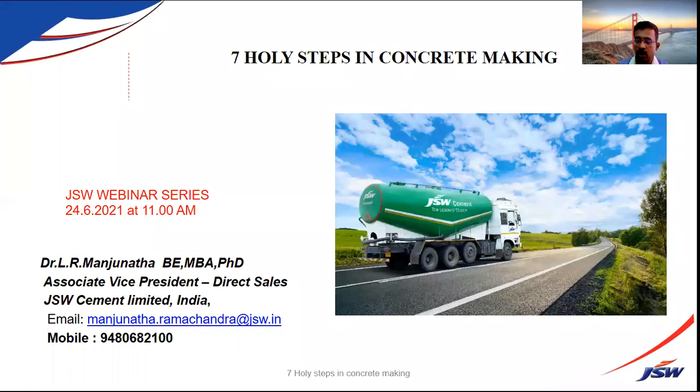You may get the best materials in concrete making, but still you may not be able to get the best quality in concrete after it is laid if you are not taking proper care. My colleague Manoj has already shared about the company vision, so I'm not going to talk about that. I'll go straight to the presentation.

These are the various products JSW is making. We have JSW PSC, which is the most eco-friendly cement. Then we have JSW Comcem, a blend of slag and fly ash - one of the best cements available in the country now. JSW Concreel HD is the cement which builds monumental structures, especially for underground structures. It's very good - a slag cement which gives very high compressive strength, just like OPC cement.

Then JSW GGBS is one cement - a product which goes with ready-mix concrete. Across India, we are selling close to about 3 to 3.5 million tons, and this product is gaining global acceptance because of its benefits. Many countries across the globe are manufacturing concrete using JSW GGBS. We are trying to export also.

Then slag - JSW screen slag is one more product. It's an eco-friendly sand, a replacement for river sand. I'm not saying it's a replacement for M sand, but it is much, much superior, and its quality and strength parameters are equivalent to river sand. This product is gaining acceptance in Karnataka, North Karnataka, and likely in South Karnataka also - many queries are coming for this product.

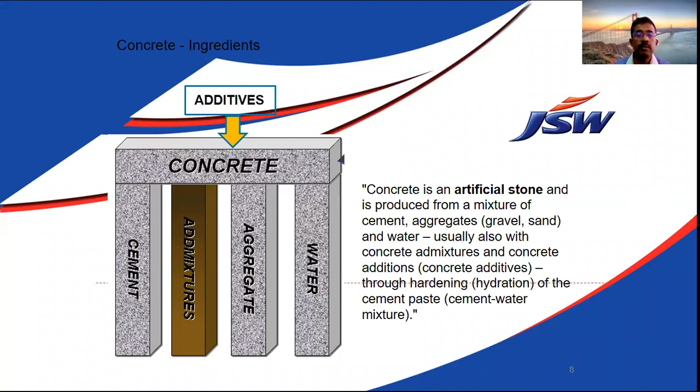Concrete ingredients mainly contain cement, which is the binding material along with water reacts. Then we have aggregates - 12mm, 20mm, 40mm aggregates. Then we have fine sand, which constitutes about 26% of the total concrete mix. Let's say we are designing concrete for 2,400 kg per cubic meter - it varies, but the density of concrete is generally 2,400 kg per meter cube.

When you want to make concrete, there may be M20 grade concrete or M100 grade concrete, so we vary the ingredients - the water cement ratio, admixture dosage, and aggregate percentage based on water absorption. Overall it will become 2,400 kg, plus or minus 10-20 kg only - we cannot add 5,000 kg to make concrete unless it's a heavy concrete, like for nuclear reactors where we use high density concrete. Otherwise, generally we use regular concrete.

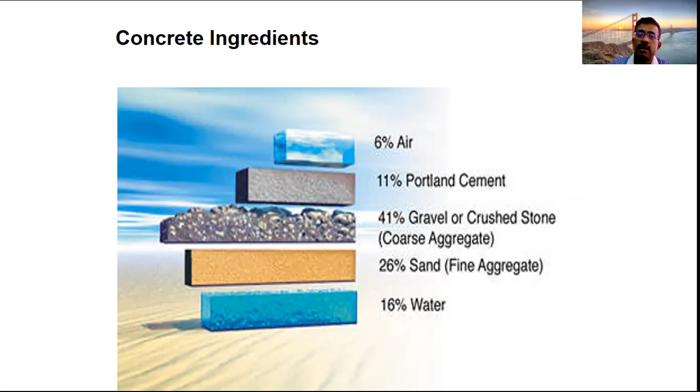So, as I've already told you how concrete is made, finally we end up with a product called ready-mix concrete. From cradle to grave, the concrete journey starts when we use clay, limestone, and iron to make clinker using a kiln in the cement mills. Then we get clinker, add gypsum or mineral admixtures and additions - there are several types of additions happening in the cement mills. For OPC cement, we add 5% performance enhancers.

We may have limestone powder, GGBS, fly ash, as a 5% additive. Then we make cement. So when the cement comes to the RMC plants, we use sand, aggregates, admixtures, and water. So with the various blends of cement, we make concrete, called ready-mix concrete.

Ready-mix concrete has different types. As I already told you, different grades starting from M15 to M100, 150, are used in India. Then we have fiber reinforced concrete, self-compacting concrete, smart dynamic concrete, concrete for mass concreting applications, and there are so many brands available, including color concretes.

So concrete is shaping up based on applications of the concrete, where we are going to use it, what is the durability performance, what is the workability performance of the concrete. Based on that, we are designing the concrete using all these ingredients.

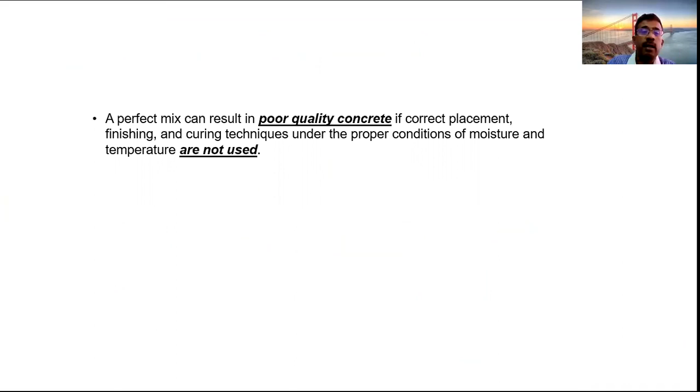Now, a perfect mix of concrete can result in poor quality concrete if the placement is not correct, finishing is not correct, curing techniques are not correct, or proper conditions of moisture and temperature are not used.

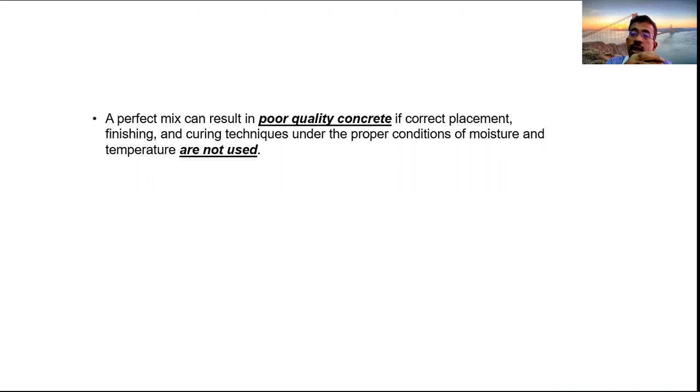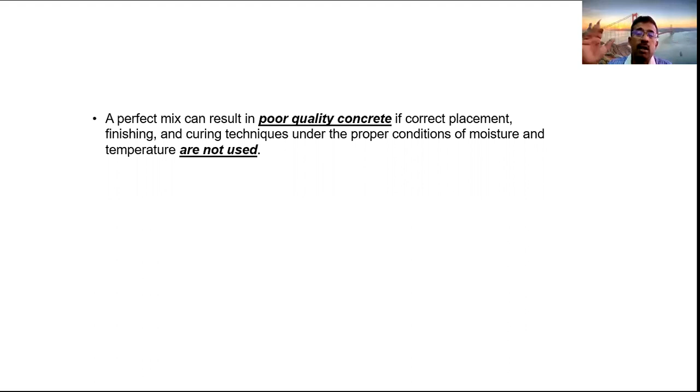If you can design a very good concrete in the laboratory, you can make the concrete at the batching plants. But if you don't place it properly, then we have a problem. That's why I'm talking about only 7 steps in concrete making.

So when specifying concrete, maybe a consultant, maybe a user, he has to look into what kind of concrete I'm ordering. I want to order concrete to the ready-mix plant. I need to understand first what is the concrete requirement for my job. It should not be wastage.

Can I order in intervals? Every 2 hours, one transit mixer should come, or should all the concrete come at one time? So the use of concrete matters — where I'm using it, for the basement retaining wall, roof slab, or column concreting.

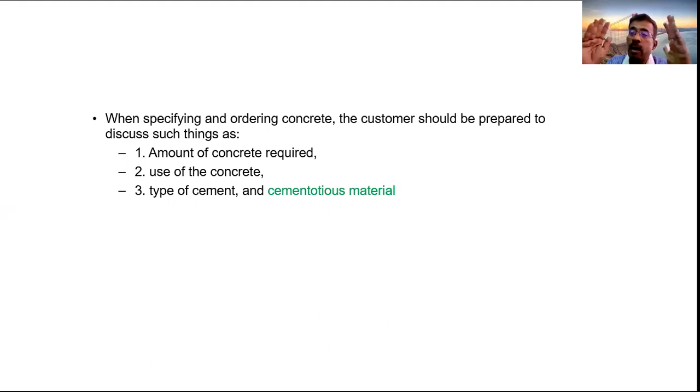Column concreting, let us say I want to use. Generally you can place 10 columns or 15 columns. I cannot order two transit mixers of concrete because the flow of work will be very slow when I'm doing column concreting. So generally people prefer to buy 3 cubic meters from the transit mixers.

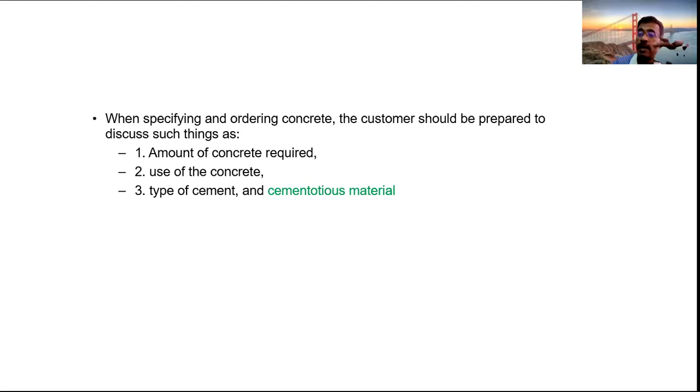Send me 3 cubic meters, let me place the concrete. Then only after placing that concrete, I'll order the next set of concrete, because you have to make a proper scaffolding for putting the column concrete. And what kind of cementitious material are you using?

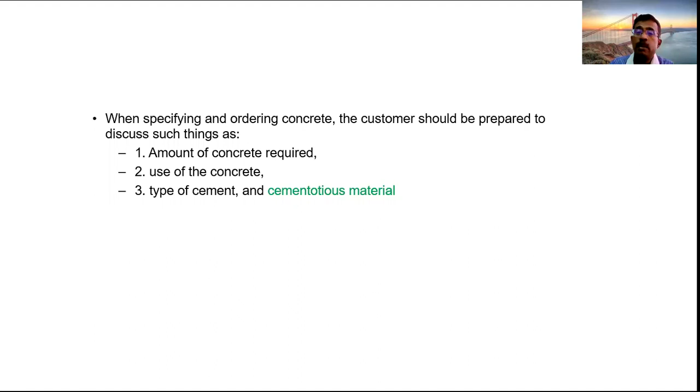I am looking at what is the cement content, what is the minimum cement content I should use, what is the water cement ratio, what is the admixture dosage, what should be the air entrainment, and what is the desired compressive strength?

My 7 days, 14 days, 28 days — I am designing the strength parameters, whether I am using it for precast, and the grade of concrete may be different. It may be M20 grade concrete, but what I am going to use for precast will be different, and what I am using for mass concreting application is different. So based on the requirement of the strength parameters, 7 days strength, 28 days, I am defining the concrete and also the durability parameters.

Then the amount of slump required. So let us say I'm using concrete for a PQC, pavement quality concrete — my slump should be 50 or 60. Then if I'm using concrete for my formwork, I need a free flowing concrete if my congestion is more in the reinforcement, so there are so many restrictions.

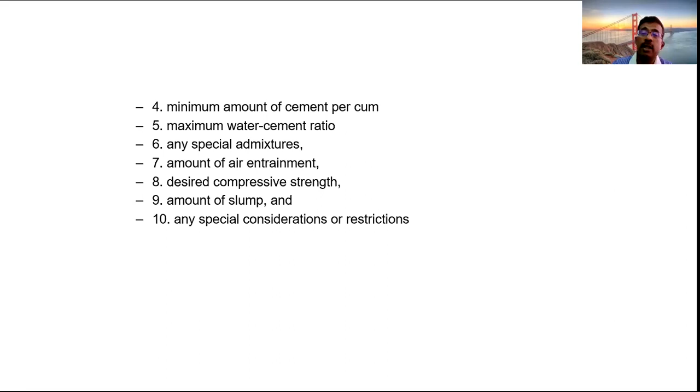So I've told you about the different types of concrete, and why concrete placing is important. So there are only 7 steps in concrete. To start with...

Starting from batching, you select the raw materials. The concrete may be made at an RMC batching plant, or it may be site mix concrete. If the concrete requirement is small, you make site mix concrete. Still, in road work, you make concrete at the site. If you are doing a small culvert work, whether it is ready mix concrete or site mix concrete, you are going.

So batching involves the various ingredients: the aggregates, the cement, the sand, then admixture. So you should properly select all the material, then start batching in a batching plant. Then mixing. The batch goes to the mixer. A half cubic meter batch size is there, a 1 cubic meter batch size is there. So exactly the required ingredients along with the water are taken in one shot and go to the mixing.

So it is machine mixing, a twin shaft mixing, or it could be manual mixing. So there are so many mixing types. Semi-automatic mixers are also available, where you put the ingredients into a small truck-mounted mixer. Then you mix it and supply the concrete.

So let us say I'm to place the concrete. Transportation plays a very important role. I am doing concreting. My RMC plant is 20 kilometers, 30 kilometers away. Sometimes the concrete has been transported up to 50 kilometers. In rural areas they want concrete, they are doing a bigger job. So see, a lead is, let us say, 2 hours. They will transport the concrete maybe 50 kilometers also. So in that case, what should be my mix design?

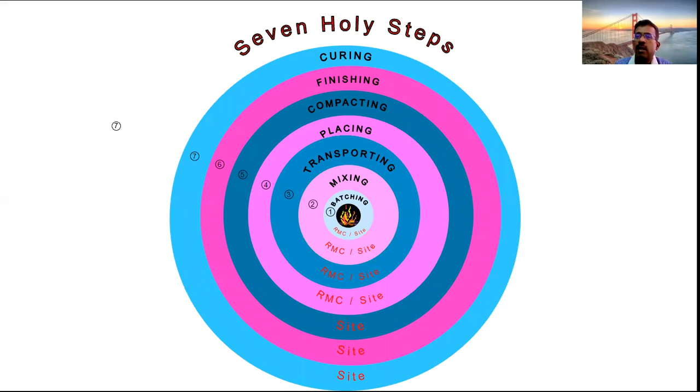Then finishing, how you are finishing the concrete is very important. Finishing the concrete means what kind of finish, like a rough finish. So the PQC requires a rough finish. External plastering is there, internal plastering is there, so finishing is very important, and also curing. How many days of curing you have to do exactly? So these are the 7 holy steps. I will explain them one by one.

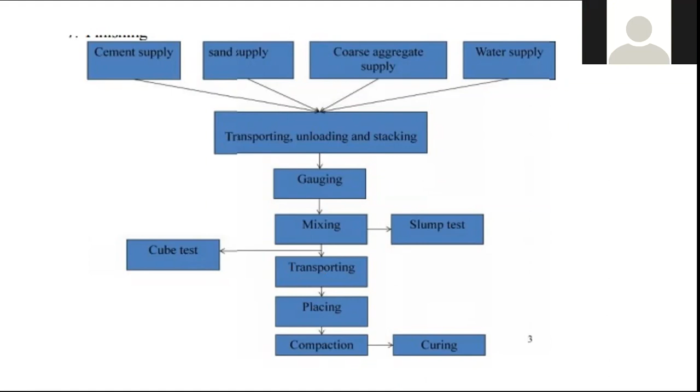This is the line diagram. We take all the aggregates, sand, coarse aggregate, water, then transporting, unloading and stacking. Get all the materials. For site mix concrete, if I'm doing 50 cubic meters of concrete, I have to have materials for 55 or 53 cubic meters, in excess. If there is a shortage, I cannot stop the work. The problem is that the labor will go, or you will incur additional cost, if you're doing manual concrete.

Ready mix concrete means how much concrete is required from start to finish. You should order it properly. That's what is required.

So gauging is important. Gauging is taking the required raw material, mixing, transporting, placing, and compaction. So after mixing is over, then you have to do a slump test, to check whether the workability is correct or not, so fine tune the mixes. Then once the mixing is done, you also take cubes. Sampling is done. Cube test is here.

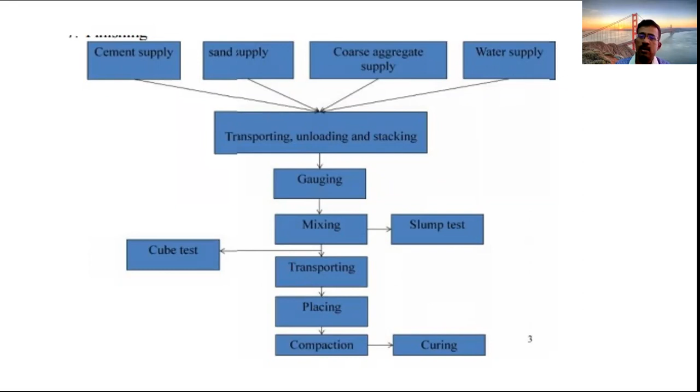So in the RMC plant, we take one set of cubes at the RMC plant the moment before the transit mixer is leaving. And after the concrete is made at the site also, you take the samples, we do slump test and cube test. So the checking of the concrete is very important. Okay.

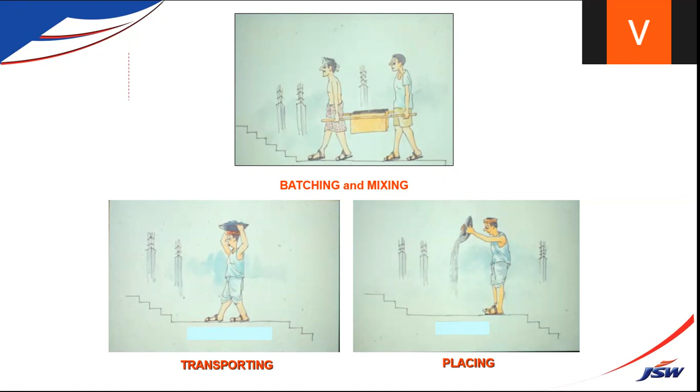So I'm giving a pictorial representation, batching and mixing. This is the good old days, when people used to do manual concrete. In India, still only 20% of the cement produced in the country is going to ready mix plants. The rest 80% is still under site mix concrete. So I don't know how long it will take in our country, because the problem in our country is that everybody becomes a civil engineer the moment he wants to construct a house.

So they hire a Mestri, and the Mestri will suggest, I will do concrete at your site, I'm going to save a lot of money. So I don't know whether the saving will happen or not, but they face a lot of problems. So batching, mixing, transporting, and placing is very important. So I'm giving some pictorial representation of how things are not getting proper when you are doing site mix concrete.

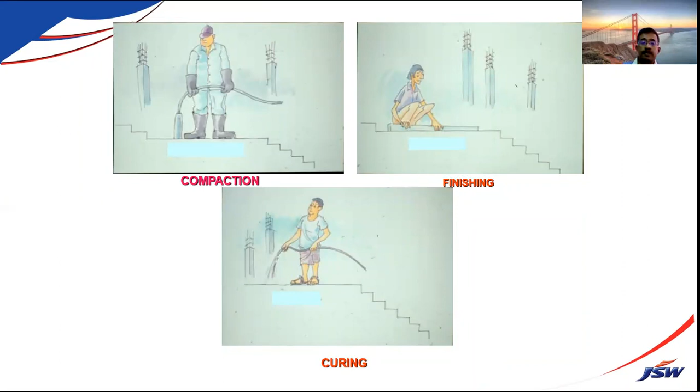The compaction is very important. Finishing is very important. And curing of the concrete is of utmost importance. You have to treat concrete like your child, a small kid, like a baby when you make the concrete. Some of the photographs, this is the general scenario in India where we have got a gang which comes to the site and starts making concrete.

So you can look at them, people are chatting here before taking the aggregates. Say they have to put 6 to 7 gamela of aggregates. So while chatting, they'll miss one or two. So the person who's standing there near the mixer machine, he has become a perfect quality control engineer. So look at him, where he is seeing. So the proper mixing will not be there when you are doing a site mix concrete.

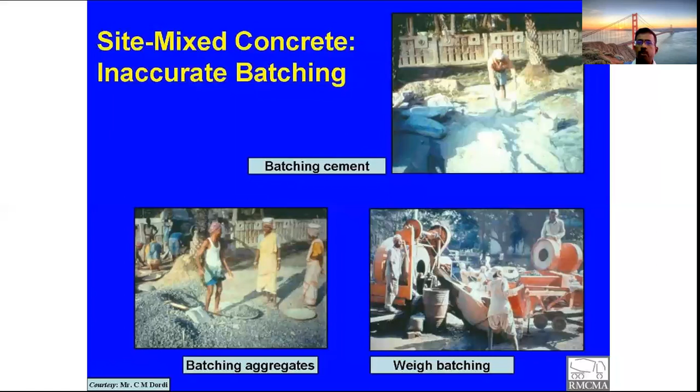And so when that kind of concrete is made, either you get a high slump concrete with a high water cement ratio, or low slump concrete where there is no slump at all. You look at the first picture, there is no slump. So generally, the guy who's sitting in front of the mixer machine will allow the concrete to go. Okay, take this concrete, because it is already mixed. He cannot do anything. Finally, the quality will suffer.

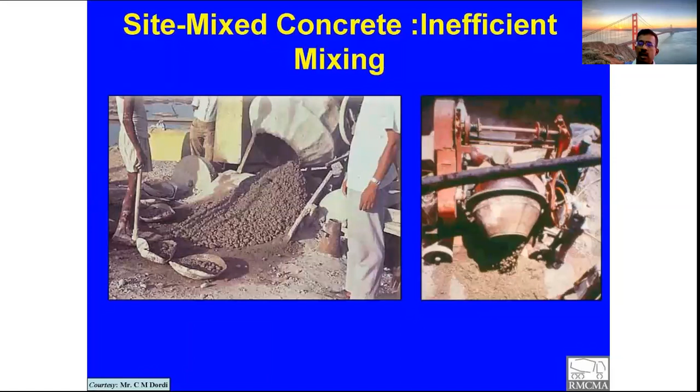At one place you are having a nice slump concrete. At another place you are having a low slump concrete. So these are the difficulties in site mix concrete. Then transportation. Look at the way people are moving on the reinforcement. It's just become a jatra. If you are doing site mix concrete, there is no quality control at all. So people walk on the reinforcement, then the cover will get affected.

So generally we have a cover of 25, 30, up to 50, based on the severity of the environment, extreme conditions. So when you are having this kind of a situation, you are going to have a lot of problems in the concrete making. So finally, the contractors start blaming the cement, start blaming the admixture company. No, you have not provided me good cement. Cement in India is manufactured in some of the best manufacturing facilities across India.

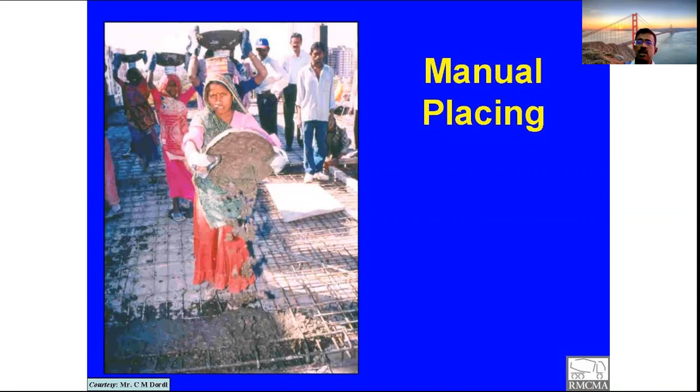Latest technology. So whatever comes out of the cement plants, it's best quality. But generally, people will not take the blame on them. They try to blame the other person, that you have not supplied good quality, when the concrete fails. So they will make other people responsible, the material supplier. He does not take responsibility on himself.

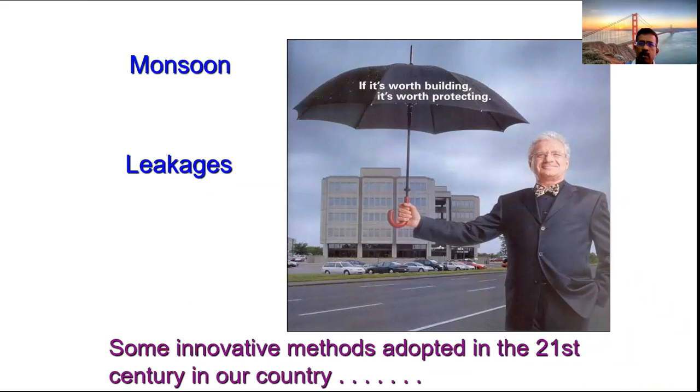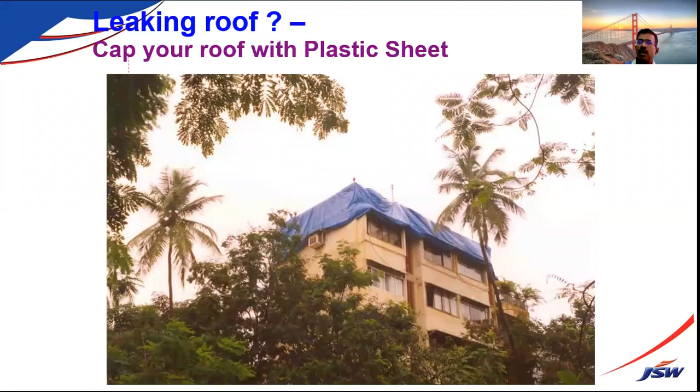So when construction is over, the monsoon comes, then you have leakages. So there are so many innovative ideas in the 21st century to try to cover our mistakes. So in Kerala, there is this one building. Look at this building. This is a new building. I visited Kerala, it is somewhere in Kochi. So they have covered the entire building with a sheet just to prevent the water entering the building, because heavy rainfall means the buildings are leaking.

In one place, such a big bungalow is there. It was leaking, I believe. So the owner decided that there is no point in repairing. He put one more shelter on this. This is how people do. So it all leads to rework, additional investment.

So the issues. So I'm coming to the properties of concrete. So concrete is a man-made material, second most consumed material on this planet after water. So fresh concrete. So what we expect from a fresh concrete is that fresh concrete should be in plastic stage. Okay. So it takes the shape of the formwork. Okay. The formwork should be perfectly aligned. So that's one important thing before placing any concrete. So you need to look at the formwork.

I was a site engineer when I started my career. At that time RMC was not popular, we were making manual concrete. So I used to go 2 days checking. Okay, one day I went to check everything. Okay, perfect alignment, each and every beam width I used to check using the tape whether it is perfectly all right. The beam depth I used to check. At that time I was so much fascinated about civil engineering, so I used to do all that checking. Is the same thing being followed by all the engineers now? I don't think so. I don't think so.

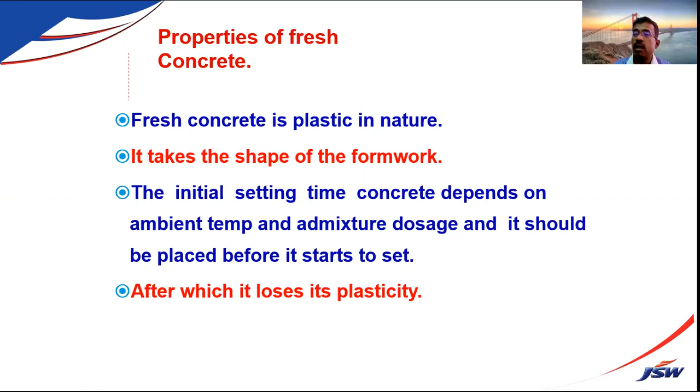Okay, the plumb, the cover to the reinforcement, everything should be perfect. Okay, so the moment it sets, you cannot do anything. So before placing, there was the inspection from the client side, the reinforcement, whether we have the proper chairs to the reinforcement. These are all we are looking at actually. So once the concrete loses its plasticity, you cannot control anything. So before that, we should take the proper care.

So I already told you, based on the severity of environmental conditions, we are going to have the cover to the reinforcement. That's very important. So generally we follow similar type of giving the cover. Okay. Because any harmful enemies of concrete like sulfates, chlorides, carbonation, they have to enter through the concrete face. So if you are providing proper cover, then it will take longer years to enter the reinforcement. It has to be protected by the concrete. So in extreme condition, up to 75 cover you should give.

But generally, I am not seeing people doing it the right way. In the projects it may happen, because projects have a strict quality control team. Whereas in the case of other structures like the IHB segment, people who are building the structures on their own, providing proper cover is always neglected. That should not happen.

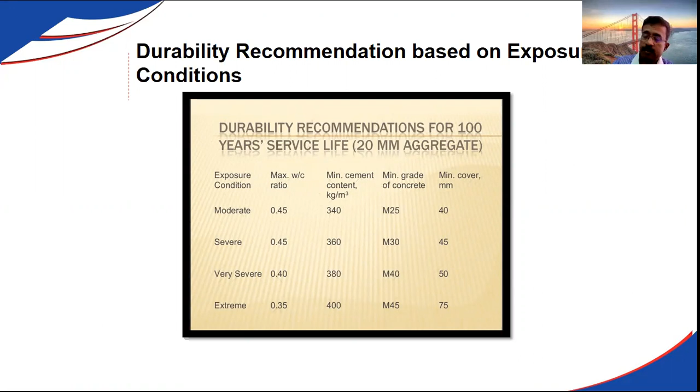So advantages of concrete are many. It takes the form of the formwork, and you can add pigments to color it. You can make colored concrete. You can polish it also. The polished concrete just looks like your granite. So versatility is there.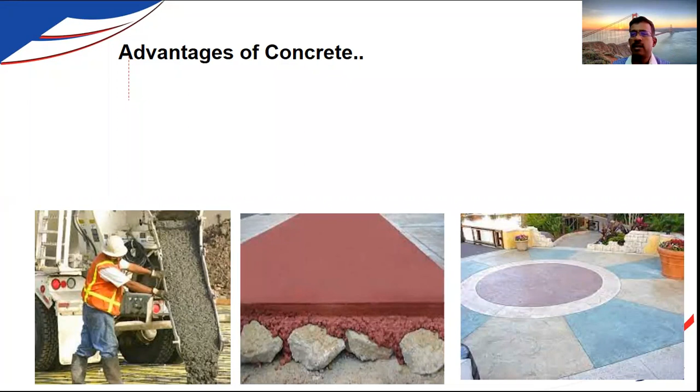Like all over the world, the acceptance of concrete is increasing now because you can innovate various types of concrete, like light emitting concrete they have invented now in the Middle East, Qatar, they are using it for the pathways. It will start emitting light in the night time. So these are the various innovations people are doing now. So continuously every day there's research work happening on the usage of concrete for various applications.

So coming to the finishing, concrete can be finished to produce surfaces ranging from glass-smooth to coarsely textured, and it can also add pigments. I still remember in Infosys Mysore, we had added a pigment because they wanted a pathway for the people to walk from one building to another building. So we did it with concrete. They selected concrete because we could add pigment and make a colored concrete for them.

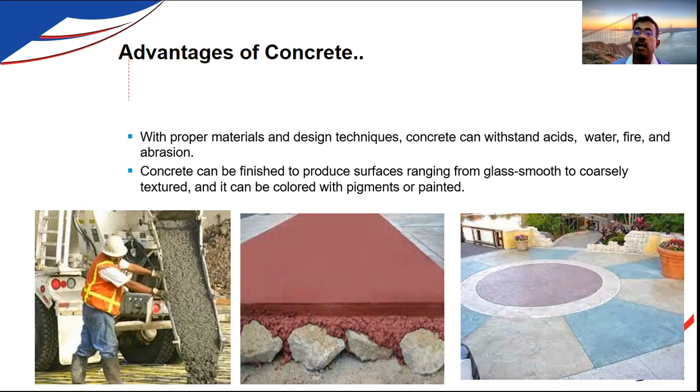So there are limitations in the concrete, as I've already told you. Like the advantages are there, we have got limitations also. The limitations in concrete: it is weak in tension. So concrete will not be able to take tension. So the reinforcement is one thing which takes the tension in the concrete. Okay, takes the forces, loads on the concrete. So concrete is weak in tension.

It is bulkier than steel and wood. So with steel and wood, the sections will be smaller. But when you take concrete, it will be bulky. To address that, what they are doing now, they are going with a high grade concrete. M80, M100 grades of concrete they are using now everywhere for the high rise buildings.

Okay. And it requires expensive formwork. So formwork is very important now for high rise buildings and also for structures. They are using very innovative formwork. It plays a very important role to give a better finish to the concrete. The concrete undergoes creep, shrinkage, and also it can crack. So nobody can say that I will give a crack-free concrete.

And it is not environmentally friendly because whatever cement we are using, if you are using only OPC cement, each ton of OPC cement liberates about 800 kgs of carbon dioxide. It's not an environmentally friendly activity. That's why we recommend people to go with GGBS for blending. GGBS emits about 50 to 60 kg per ton of GGBS production, whereas cement is emitting 800 plus kgs of carbon dioxide.

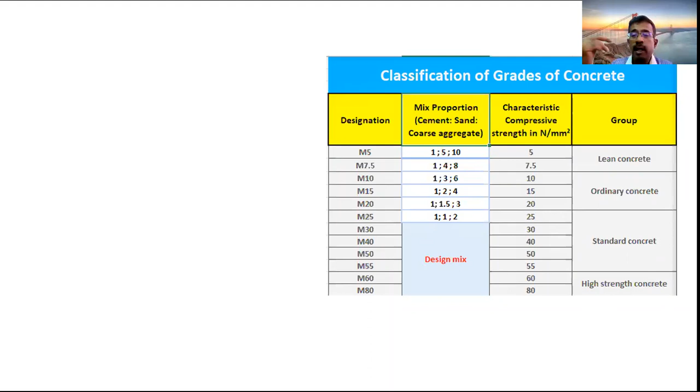So various grades are there, the classification starting from M5 to M80 I've given. From M30 onwards, we have to go for design mix concrete. Up to M25, we can go with volume batching with the proportion. Starting from 1:5:10, M25 grade concrete comes with 1:1:2, M20 with 1:1.5:3. So volume batching is allowed up to M25. For M30 grade and above, standard concrete with standard deviation, you have to design the concrete.

So across the world, people are making concrete at the laboratory level of M700 grade, concrete equivalent to steel strength. We say Fe 500, Fe 550, Fe 600; that is the strength of steel now. People have designed concrete using various materials and technology up to 700 MPa. That is the highest grade of concrete, designed at the laboratory level.

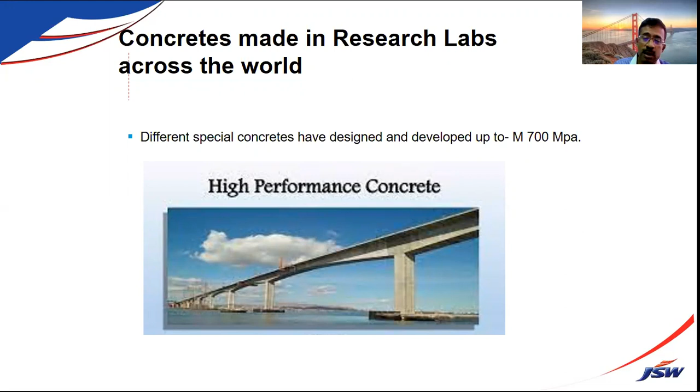Using that kind of concrete, you don't require steel at all. You can make concrete without steel using that kind of concrete, called reactive powder concrete. Some small bridges have been built in many countries without using steel. They have done it using pure concrete only, called high performance concrete. So the components of concrete are many.

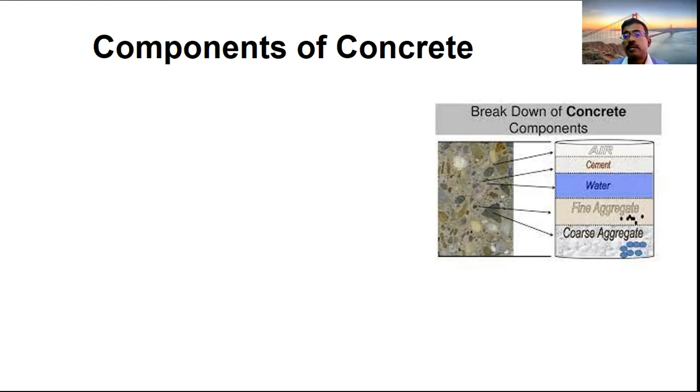So Portland cement: what kind of cement we are going to select is very important while making concrete. Whether a pure OPC cement or a blended cement, slag cement, high volume slag cement, high volume fly ash cement, many types of cements are available in the market. If you are making site mix concrete, going with a blended cement is the most ideal thing. As I already told you, using OPC is detrimental to concrete, not only because of the various reactions in the concrete, but also you are increasing the carbon footprint, as the emissions are more using OPC cement.

When you are making ready mix concrete, you should go with GGBS or fly ash, or a combination of GGBS and fly ash based on the availability of the materials. In South India, Bangalore especially, they have adopted to go mainly with only GGBS mixes. Coming to aggregates, we have sand, gravel, and crushed rock.

Water is one of the main components in concrete making. Without water, we cannot make concrete. Using water wisely is very important. So use admixtures, PC-based admixtures, to reduce the water demand, because in summer we don't get water to drink in a city like Bangalore. In many places drinking water is very difficult to get. So using admixtures, you can reduce the requirement of water by up to 30% or 35%.

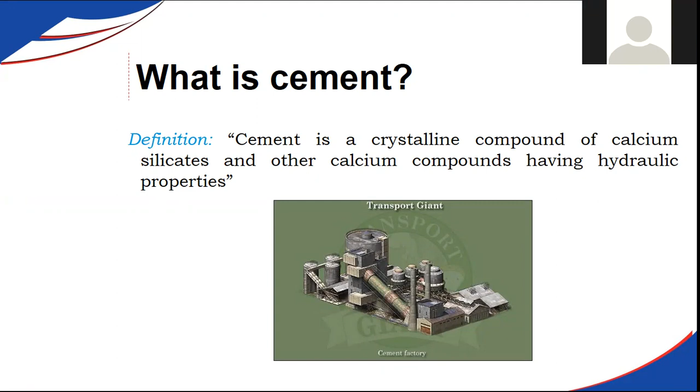So when you want to design concrete, you have to go with other ingredients like cement, then aggregates, then sand, then water and admixtures. So I'm going to talk about cement a little bit. Quickly, I'll go through that. The function of cement is to gel all the ingredients together and to give workability, to place it, compact it and cure it.

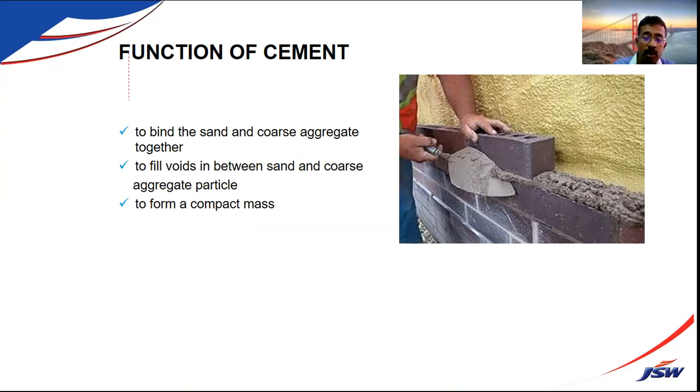So cement is used as a mortar also. Cement and sand mix is used as a mortar and also as a concrete. So the binding ingredients in the concrete or the mortar are cement and water. So the function of cement is to give a proper shape to the element.

Then looking at Portland cement, Joseph Aspdin was a bricklayer in the United Kingdom. In 1824, he invented a cement that was called Portland cement. Since then, the Portland name has become synonymous, like how we call photocopying Xerox. Portland has become common with all the cements: Portland slag cement, Portland Pozzolana cement, Portland OPC cement. So this invention happened in 1824 in England.

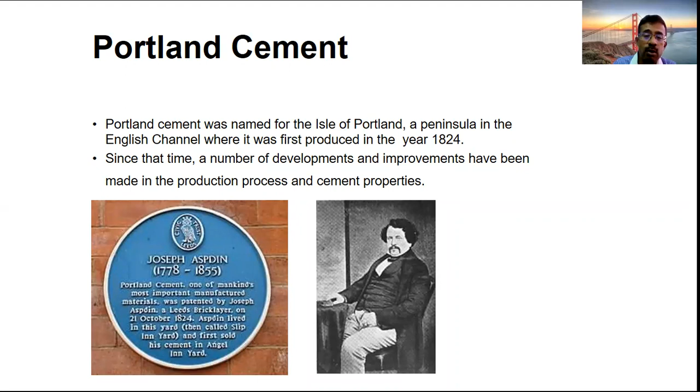Since then, the usage of cement has been gaining acceptance across the world, because it is the most valuable material and you don't have any complete replacement of cement. In cement, we have various ingredients: calcium, silica, aluminum, iron oxide, and gypsum in various proportions. One main component in cement is calcium oxide, 63%, silica 22%.

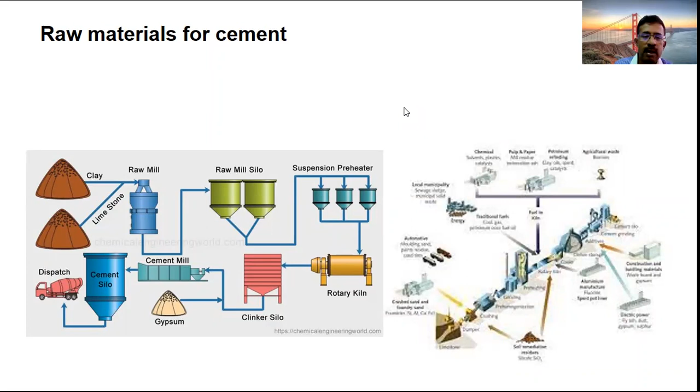This is the manufacturing process of cement. We get all the raw material, clay, limestone, and it comes to the raw mill. From the raw mill to a raw mill silo. Then it goes to the preheaters. Then we get the clinker from the rotary kiln. Then the clinker is stored in a silo, and in the ball mill, we grind the clinker along with gypsum, or we grind it with fly ash or slag to get various types of cement, PPC, OPC, slag cement. And finally, it gets dispatched to the customers. This is the manufacturing process.

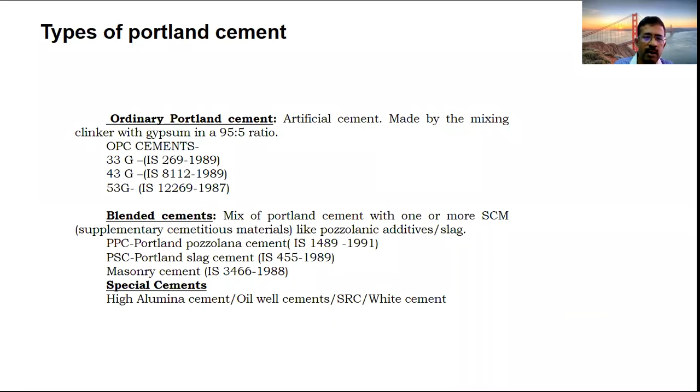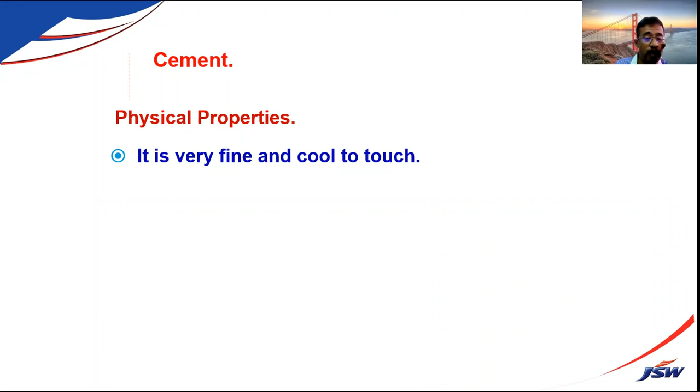And types of cement I've already explained to you. 43 and 53 grade cement, 33 grade cement is also available. And we have various types of blended cements. Cement chemistry: if you're using cement, you should always get fresh cement. You can use cement up to 1 or 2 months old, but only if it is properly stored will that cement be good.

It is hygroscopic in nature, so it absorbs moisture. So it should be watertight. You should store it in watertight, moisture-tight godowns. So proper packing of the godowns is very important. Otherwise, in the rainy season, the cement gets damaged if you are storing it for a longer time.

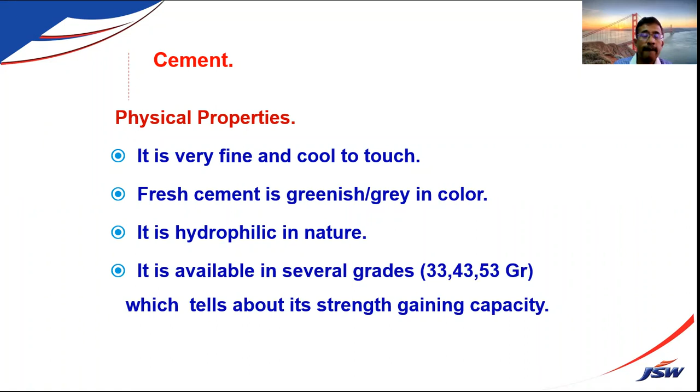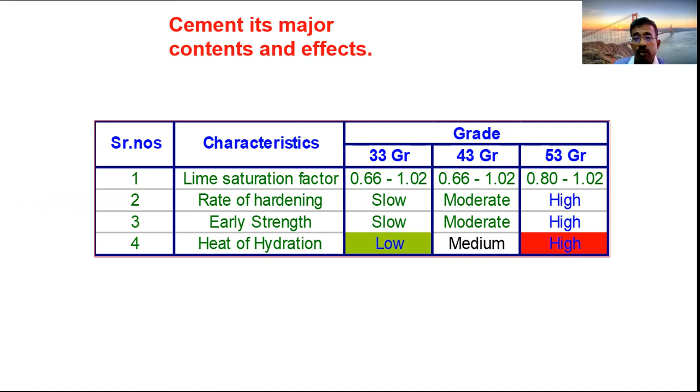So, what are the constituents of cement? The various grades of cement. I'm showing the lime saturation factor. What is the lime saturation? Then the heat of hydration. I'm showing here early strength and rate of hardening. So as you go from 33 grade to 53 grade cement, all the parameters keep changing.

The main active ingredients in cement are tricalcium silicate, dicalcium silicate, tricalcium aluminate, and tetracalcium aluminoferrite, along with gypsum. So in any cement, generally, you have these: tricalcium aluminate, tricalcium silicate 50%, dicalcium silicate 25%, tetracalcium aluminoferrite 10%. This constitutes a cement. The highly reactive components are tricalcium silicate and dicalcium silicate. Tricalcium silicate helps in the early strength requirement, from the first day to 3 days. The additional strength development happens through reaction of the dicalcium silicate.

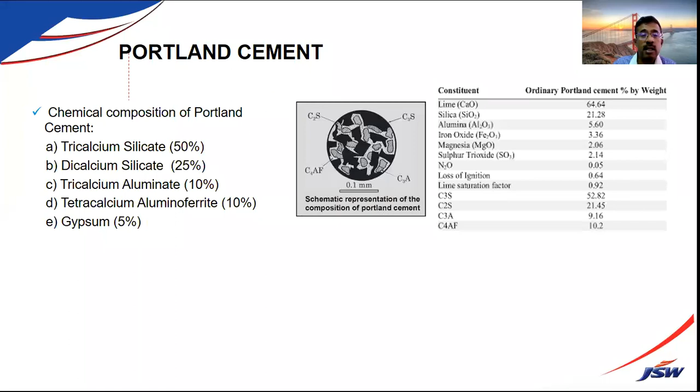So one by one, I have already explained to you. This is the function of each chemical component of cement. Tricalcium aluminate, C3A, should not be very high. It helps in the initial strength development. If it is in a higher percentage, it leads to poor sulfate resistance. That means you should not have more C3A content. And also volumetric shrinkage will happen upon drying.

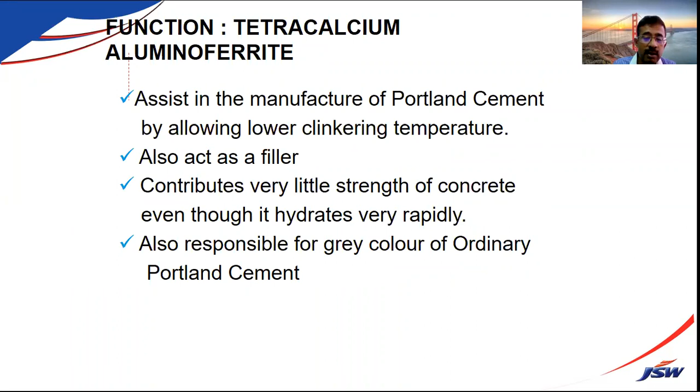Tetracalcium aluminoferrite is one more component. It acts as a filler material along with calcium hydroxide and CSH gel.

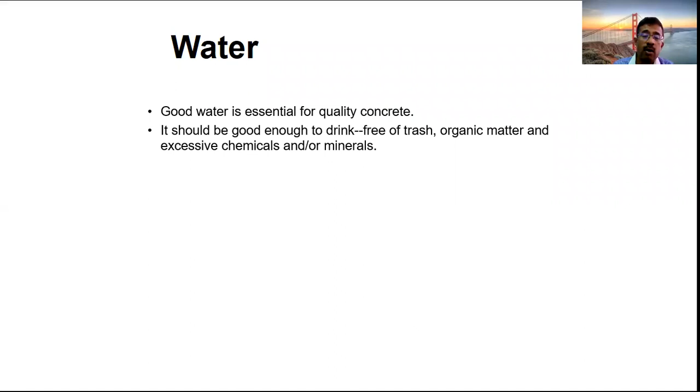Then coming to water, usage of water is very important in concrete making. You should use very good quality water. Potable water should be used, and reduction in water consumption in concrete making is a must, because water is not easily available. We should preserve water by using admixtures and also curing compounds, so we can avoid using water for curing. We can start curing the concrete by applying curing compounds.

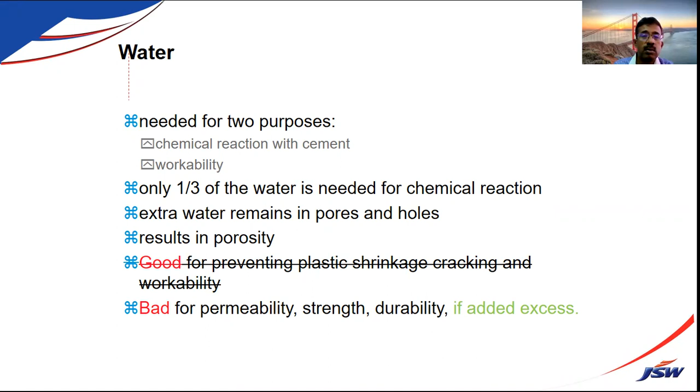So water is very much required, as I've already told you, both for chemical reaction and workability.

SCMs, supplementary cementitious materials, are very important. We have fly ash, silica fume, and pozzolans, which go with the concrete, in various percentages. We have made concrete using GGBS for M70, M100 grades of concrete, and various percentages we have used, starting from 25% to 70%.

So I'm talking about mineral admixtures. We have Class C fly ash, Class F fly ash. Fly ash is becoming scarce now because the dependency on thermal power generation is reducing day by day. We are going with mainly GGBS now, it's available. Silica fume is available for high grades of concrete.

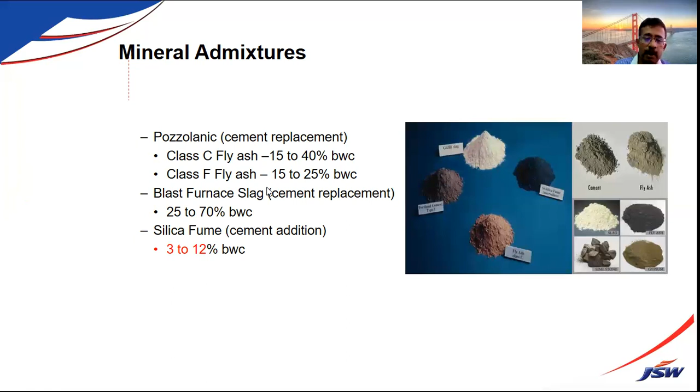So for these mineral admixtures, we have to check the source of material. There are a lot of duplicate materials also available. You should not depend on them. Buy from a reputed company when you are buying these products.

So aggregates, very important. The shape of the aggregates, the angularity, the flakiness index of the aggregates, the moisture absorption of the aggregates, very important. Now, for the replacement of river sand, we have got slag sand, which is available, which can be replaced completely with 100%. JSW is manufacturing this slag sand from our Bellary plant and also at Dolvi.

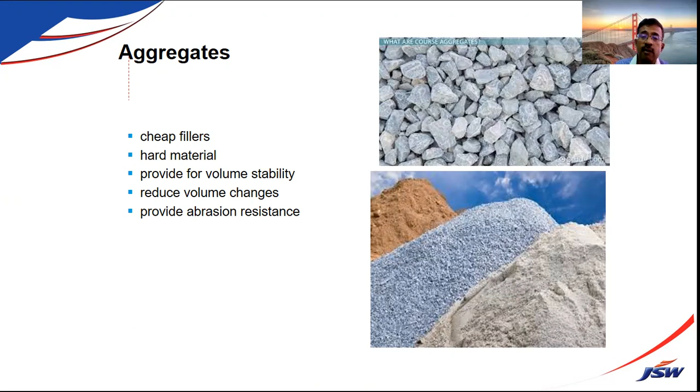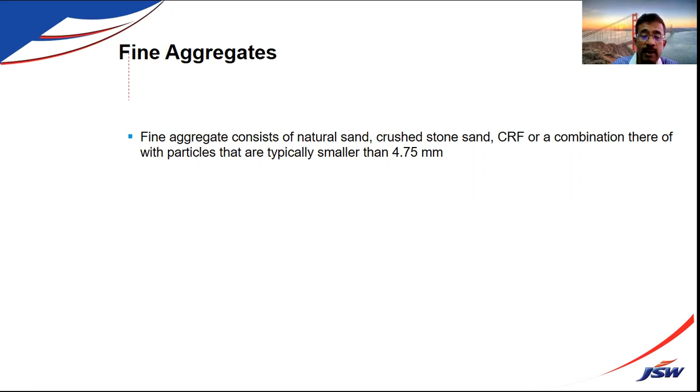So this is gaining acceptance everywhere as a replacement of river sand. Aggregate occupies 60 to 70% of the total volume of concrete, and selection of good quality aggregate is a must to get good quality concrete. It should be as per IS 383 2016 specifications, coarse aggregates and fine aggregates also. We should properly check before selecting, because fine aggregate plays a very important role in designing the workability of the concrete.

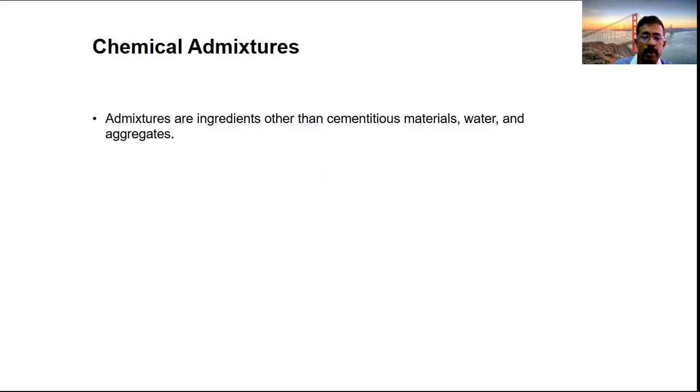The chemical admixture, there are hundreds of companies manufacturing chemical admixtures. You should select the right one; for every batch you should not change the admixture based on pricing. Select the suitability of the admixture based on the requirement of aggregates and other demand, then go with the right admixtures. Don't keep on changing in between. Many companies are changing admixtures based on the pricing. That should not happen. They should go with an admixture which gives proper workability, proper design.

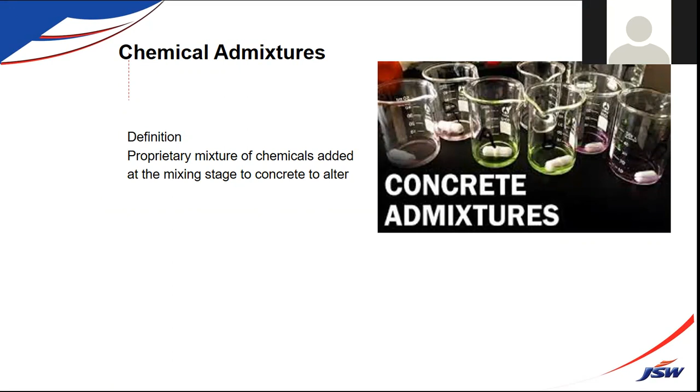So there are many chemical admixtures. They help improve the performance of the concrete at the workability stage, mainly to improve the slump, to make the concrete flow, keep the mix cohesive. They help in reducing the water demand. So admixtures are mainly used for this. Nowadays, 100 types of admixtures are available.

The usage is predominant across India and all over the world, because they're changing the rheology of the concrete, using lesser water to get higher strength, M100, M120 grade of concrete. You should go with an admixture.

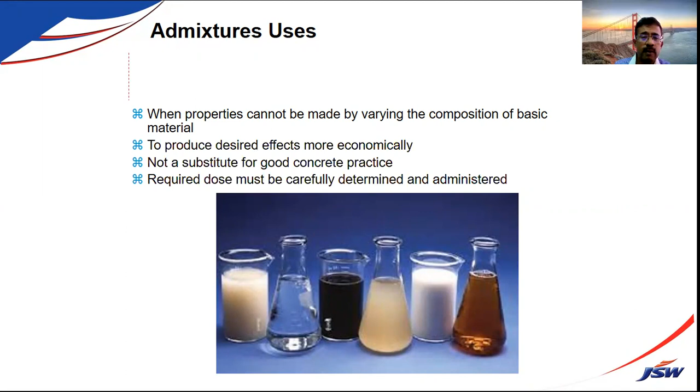So coming to the admixtures, check the job specification. For what purpose the concrete is being used, whether it's a waterproofing concrete, whether it is a mass concreting application, whether it is a roof slab, whether you are doing the concrete in the open area where the wind velocity is more, it sucks away the water when you place the concrete. These are very important things when you are making concrete.

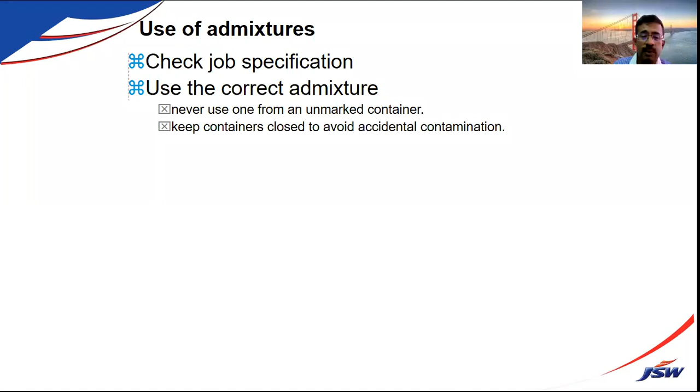That's why I'm talking about 7 steps only in concrete. Adding the mixing water is very important, the dosage of water, how much you have to add, what is the percentage of water cement ratio.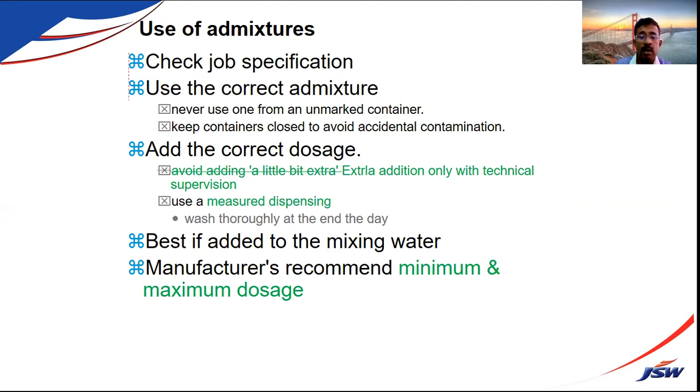Manufacturers recommend minimum and maximum dosage. When you're using admixtures, they give what should be the minimum dosage, what should be the maximum dosage. As per those guidelines, you have to use the admixtures, and it need not be the same for all admixtures. Different companies have given different formulas; their manufacturing process is different, formula is different, blending of chemicals is different.

So based on manufacturer recommendation, we should go, but many RMC plants I find go with a common dosage of admixtures, 0.6%, 0.7%. That should not happen.

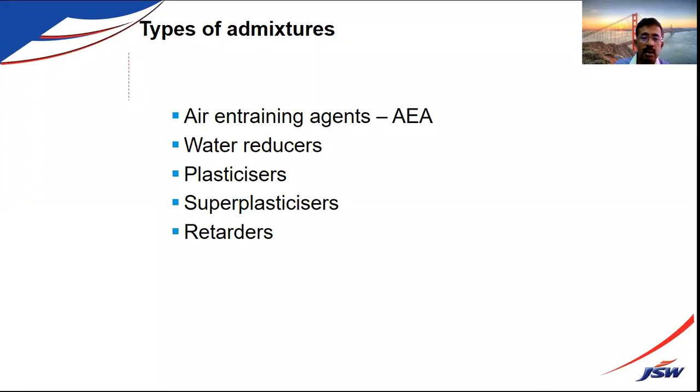There are types of admixtures: air entraining agents, water reducers, plasticizers, super plasticizers, then retarders, accelerators especially used in the precast industry, PCE-based admixtures. So this is the family of admixtures used in concrete making based on the requirement.

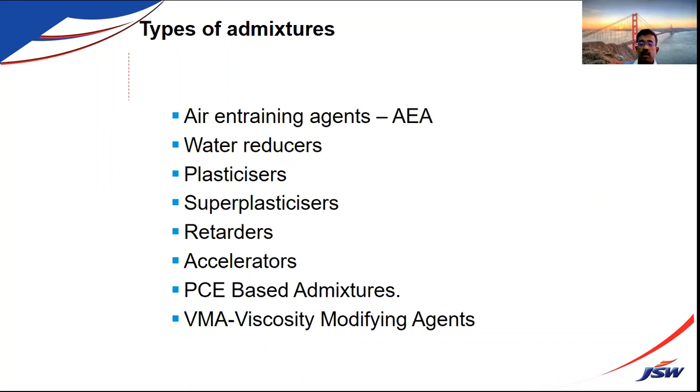And VMA, viscosity modifying admixtures, especially to change viscosity, because the mix becomes very tight if you are doing 500 kg plus cementitious material, especially in self-compacting concrete. Adding VMA to have proper slump retention and flowability is very important. So VMA admixtures play a very important role in concrete making and foam concrete.

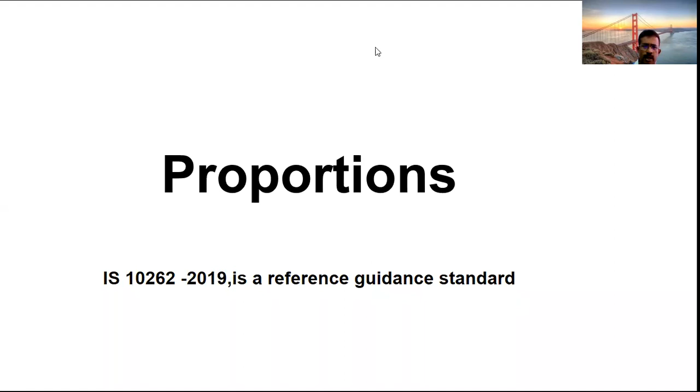So design the mixes as per the IS 10262 specifications. It's the latest code which incorporates the usage of GGBS also in the concrete mixes. Earlier codes were not having this, but now the new code has different mixes, different examples, which can be followed by any engineer at the site who is designing the mixes. Based on that, we can go with the mix design. Finally, the goal is to get proper quality.

Workability is very important. Slump, fresh properties, temperature control, density and yield are important. Air content is important. Time of setting, concrete setting.

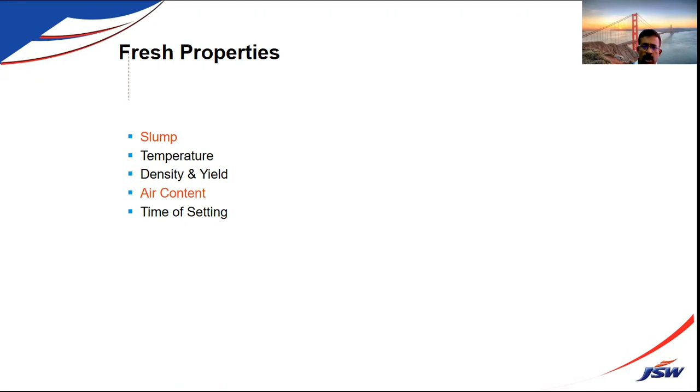Let us say you're doing concreting in the rainy season, you have to place the concrete in the morning before the raining happens in the night or evening. So the concrete should be set, otherwise it will be washed away. We have seen many sites that continue concreting during monsoon season. The moment rain starts happening, especially in a coastal environment, you have to properly cover the concrete once it's made.

Fresh properties, workability, ease of placement is important, homogeneous mix is important, and consistency. Each and every batch of concrete we are making should be consistent, should have the same specifications, same workability. That can only happen in ready-mix batching plants.

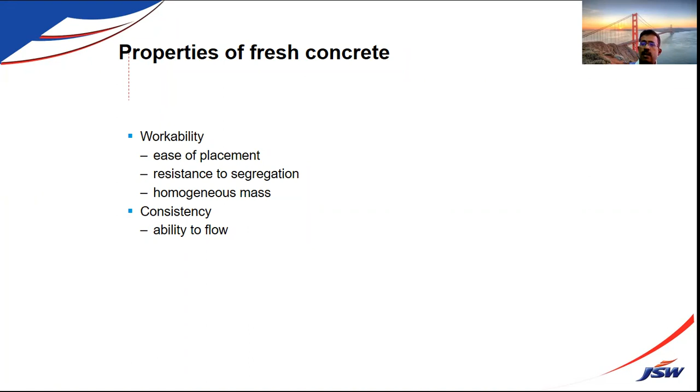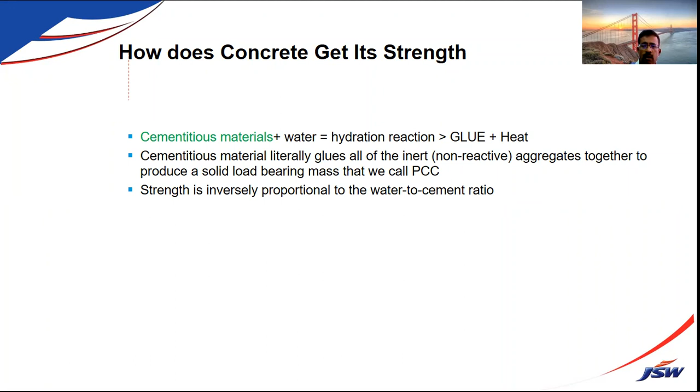Strength - compressive strength, flexural strength, tensile strength - these are the three strengths we look into for concrete making. Compressive strength is very important because based on that only the payment will be released by the client to the contractor. If we are not satisfying the strength requirement, we will not be able to get the payment, and the blame game will start on cement companies or admixture companies. So the person handling concrete at the site should take utmost care while making it.

What's important is the usage of mineral admixtures along with the cement, it's very important whenever you're making concrete. I was in RMC India long ago, and at that time 50% of the mixes were pure OPC mixes. Converting them to blended concrete using GGBS or fly ash took a long time. Today, hardly about 10 to 15% of the mixes are pure OPC cement; the rest have been converted into blended concrete.

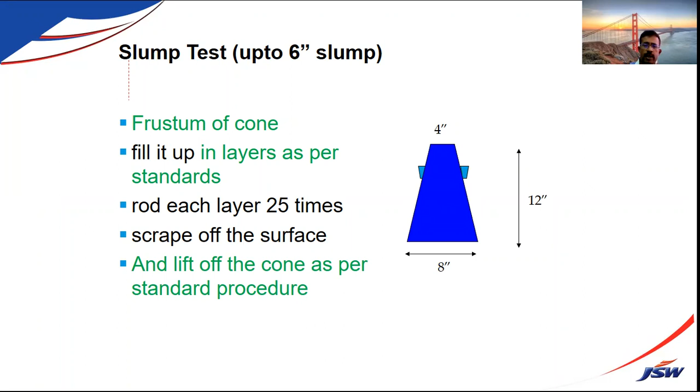Measuring slump at the site is very important, proper measurement should be there. Proper compaction in layers - 25 blows in 4 layers should be done - to give proper slump.

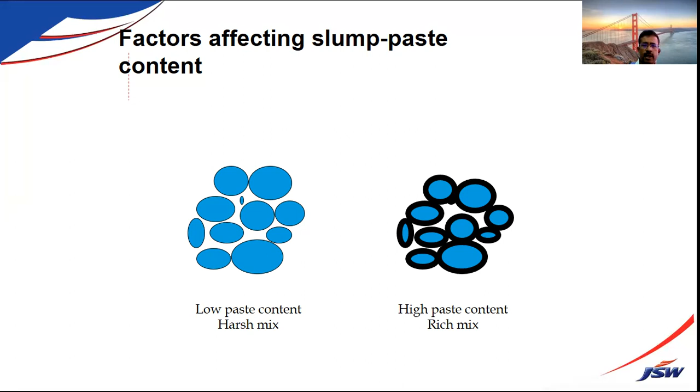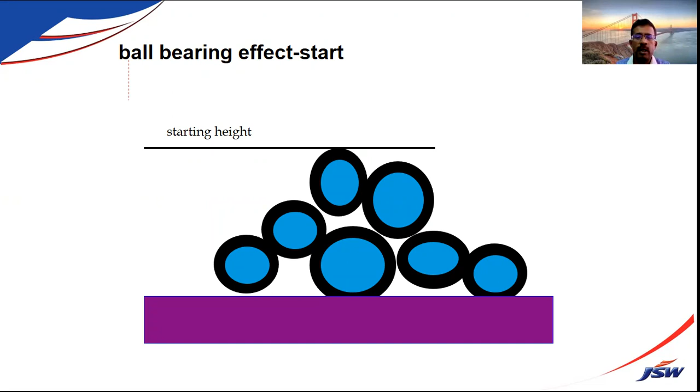Factors affecting the slump include the paste volume as well as the aggregates - flakiness index and elongation index. These are various things causing problems. There's a ball bearing effect: when you use mineral admixtures, you get a ball bearing effect in the concrete because it helps the concrete flow. If the shape of the aggregate is different, we have less space. So aggregate shapes are very important when making concrete. Selecting the right quality of aggregates is important - you should not have aggregates which are very flaky.

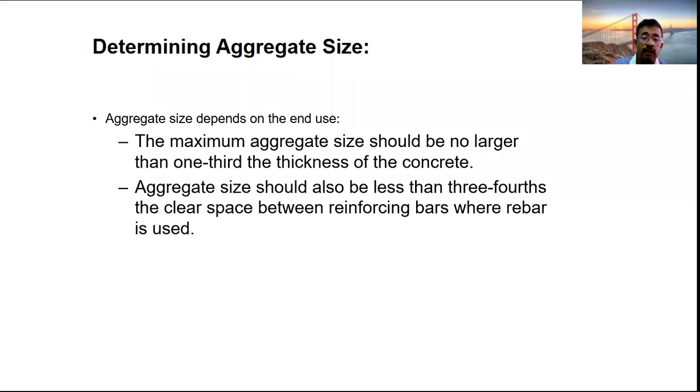Coming to the durability performance of concrete, durability is determined by the water impermeability of the concrete, sulfate resistance, chloride resistance, resistance to alkali silica reactions, and resistance to carbonation. So when designing the concrete, we should keep this in mind. Using blended cements and supplementary cementitious materials is going to help us design the mixes.

With this, I would like to close my presentation. There are only 7 steps in concrete making we should follow properly, starting from batching, mixing, then transportation, placing, compaction, and curing. These 7 steps will help to properly make the concrete. Even if you are making good quality concrete, if you don't follow these 7 steps, you will not get the results.

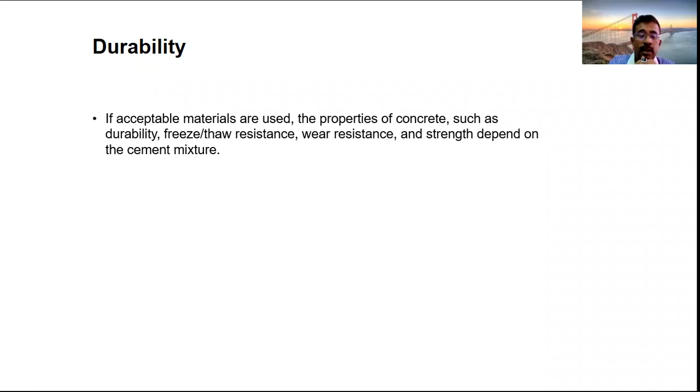And then checking the concrete - slump, cube testing, and other testing methods - should be followed as per the IS guidelines. Thank you very much for listening to this presentation. If anybody has any doubts, I will address the questions later on. So it's over to Manoj, thank you very much, sir.